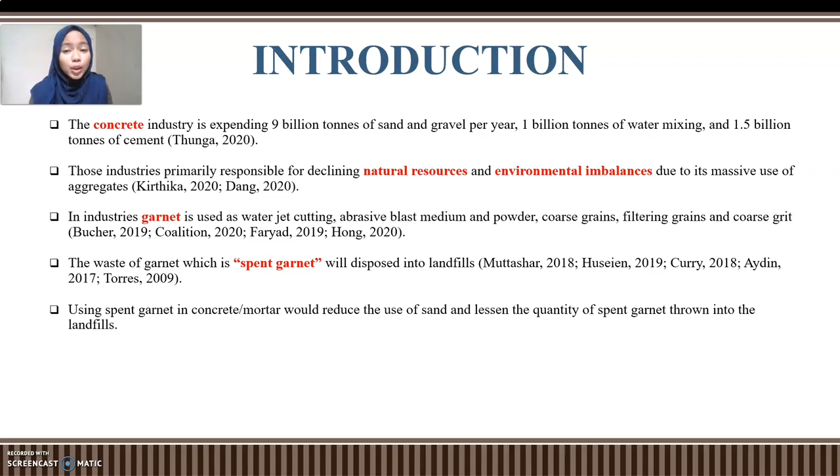So, as this concrete demand increases, those industries are primarily responsible for declining natural resources such as sand and aggregate, and will lead to environmental imbalance due to its massive use of aggregate. Measures also have in that garnet industry that use it for water jet cutting, abrasive blast medium and powder, coarse grain, filtering grain and coarse grit. So, the waste of garnet, which is called spent garnet, will be disposed into the landfill and will create the environmental issue.

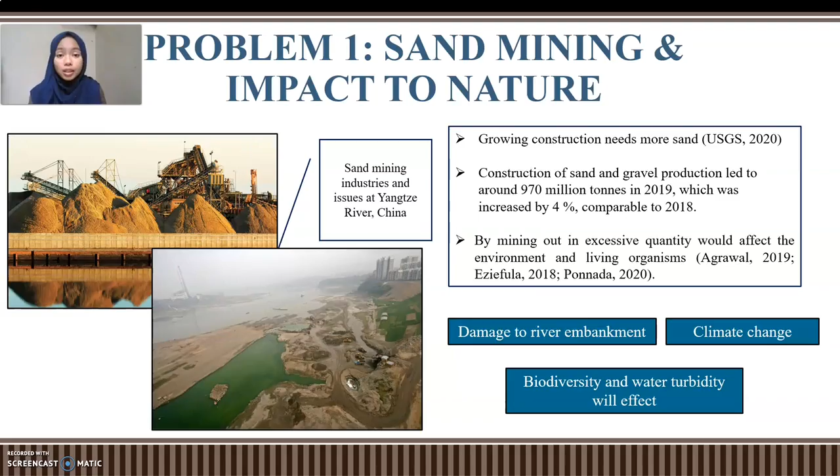First problem why I made this paper is because of the issue of sand mining and its impact on nature. As I mentioned before, growing construction needs more sand. Mining it out in excessive quantity will affect the environment and living organisms, such as damage to river embankment, climate change, biodiversity, and water turbidity. Next problem is spent garnet waste.

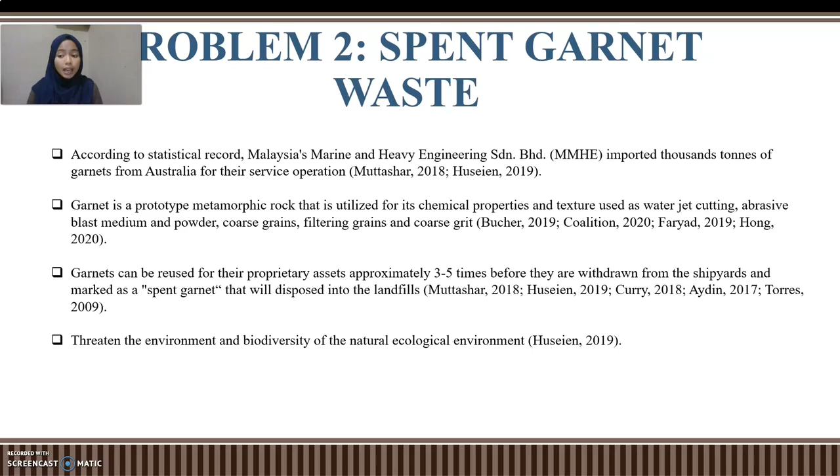According to statistical record, MMHE imports thousands tonnes of garnet from Australia for their service operation, reported by Muttashar 2018 and Huseien 2019. This garnet can be reused for their proprietary asset approximately 3 until 5 times before they withdraw it from the shipyard, marked as spent garnet that is thrown into the landfill, which will create some environmental issues.

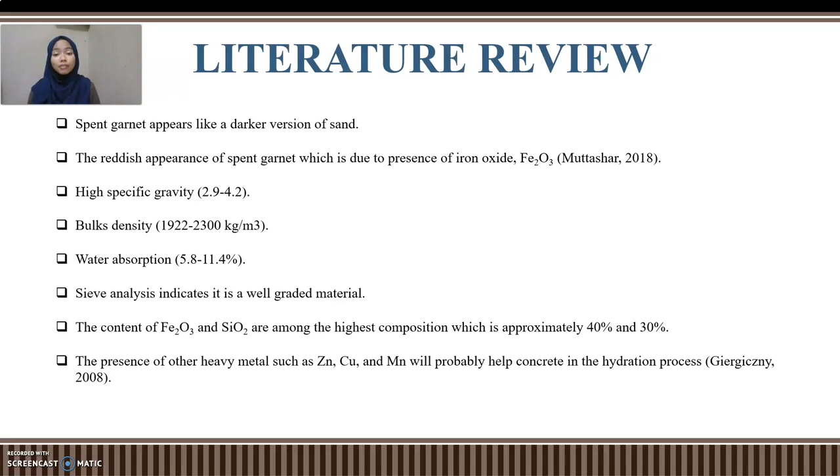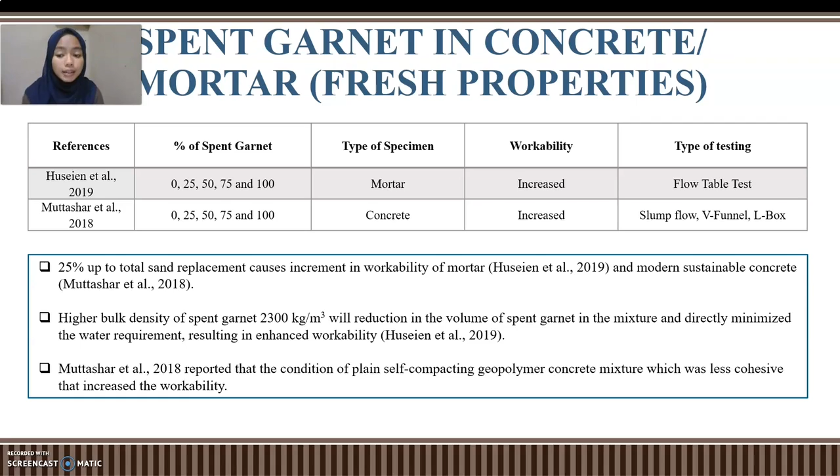First researcher is Huseien et al. 2019 that used the flow table test for the fresh properties of the mortar. The result is increased. Same goes to Muttashar et al. 2018, but Muttashar et al. 2018 made a concrete. Based on the result, we can conclude 25% of total sand replacement causes increment in workability of mortar and concrete.

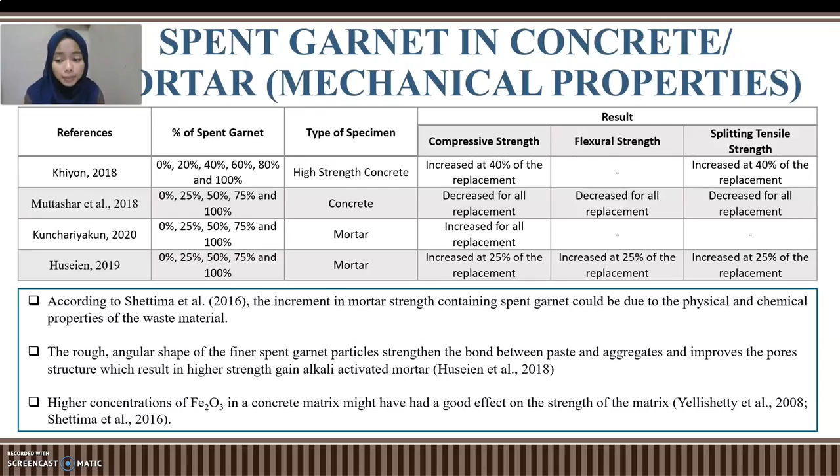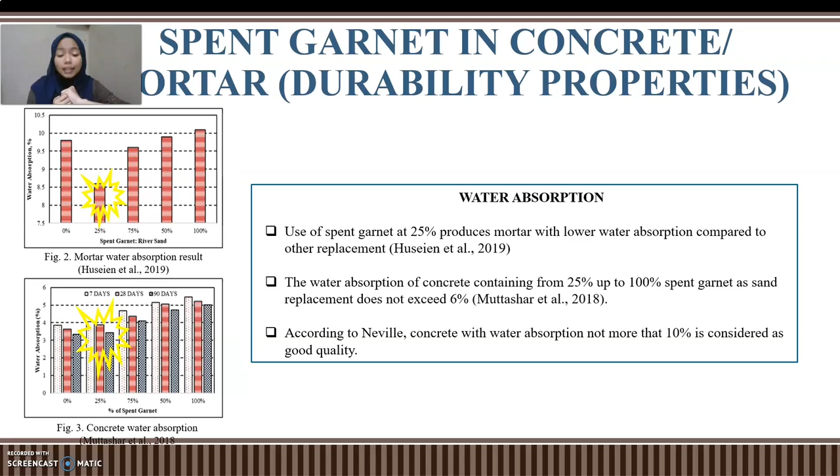Okay, it is categorized as a good quality concrete because according to Neville, concrete with water absorption not more than 10% is considered as good quality. So, okay, this result is for the acid attack resistance.

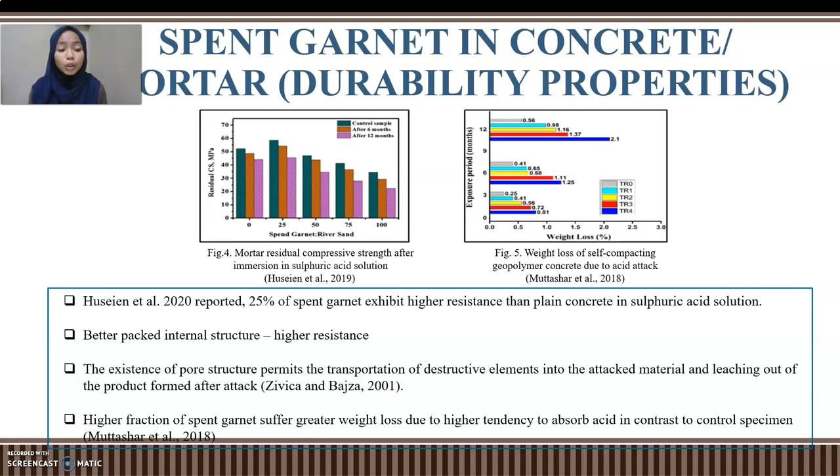The integration of the exact quantity of spent garnet will be able to better pack the internal structure, which will lead to higher resistance of the concrete and mortar. The lower resistance of the concrete and mortar is due to the existence of pore structure that permits the transportation of destructive elements into the attacked material and will leach out the products formed after attack. The higher fraction of spent garnet will suffer greater weight loss due to the higher tendency to absorb acid in contrast to the control specimen, as reported by Muttashar et al. 2018.